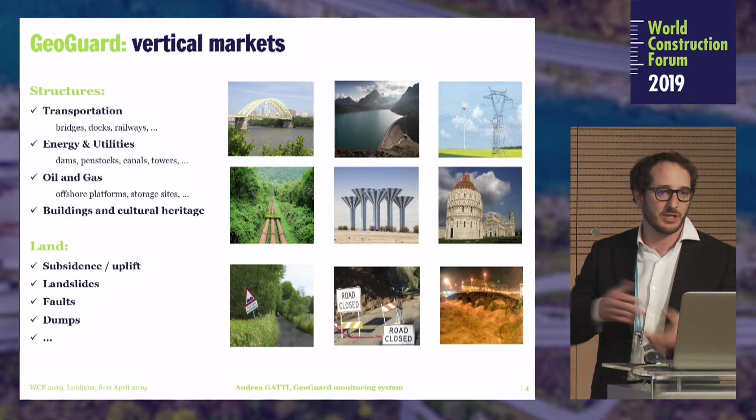GeoGuard is a service that can be used for monitoring different kinds of structures, such as buildings or bridges, but also landslides or reservoirs. We have already done a lot of installations in different kinds of structures, for different kinds of monitoring.

The system is based on relative positioning. We install a certain number of receivers on the sites that we have to monitor, and we compute relative positions from one point to all the others, or other kinds of combination. It's not required to have intervisibility between points, but we obviously need sky visibility to get satellite information.

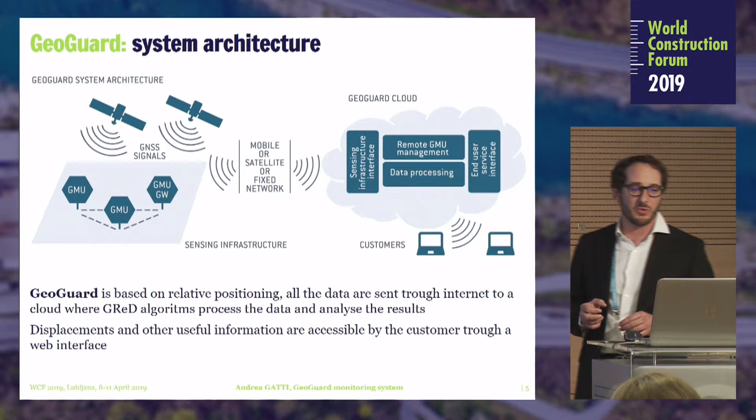The data from the stations are sent through internet or other kinds of wireless system to the cloud. In the cloud, we compute solutions and we provide the customer the information about the position of these points. Every site and every unit is calibrated and tailored specifically for that kind of installation. We provide the system as a service, and we are continuously improving our algorithms and our analysis.

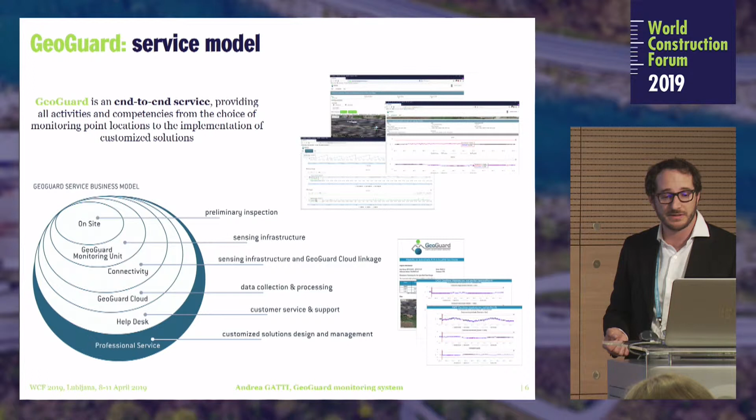We start from doing the inspection on the site, and together with the client we decide how many points are needed and where to locate them, and we follow the client until the full customization of the installation. We can also integrate other kinds of instruments and sensors into our unit to provide data to the final client.

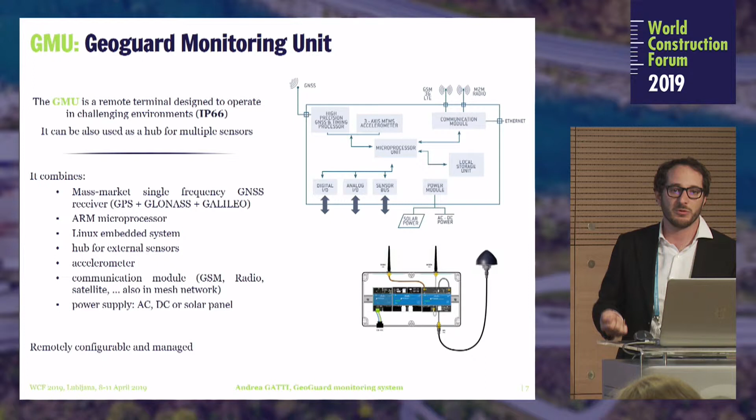This is a relatively complicated scheme of the unit, but basically it's a GNSS module together with the processing unit that can be attached to other external sensors, such as temperature, pressure, accelerometer, or whatever else. They can be installed as standalone units, with a solar panel and a battery, so they can stay alone in remote areas, or obviously attached to power and maybe an internet connection.

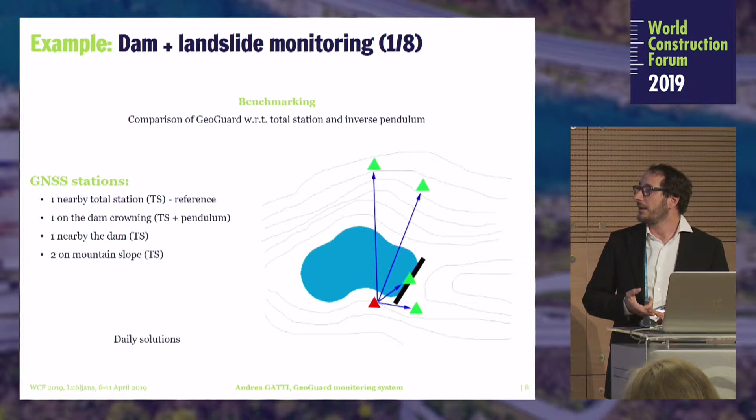The first question clients asked us in the past when we started monitoring some structures was: is this technology valid, is it comparable with traditional ones? Here I'm presenting a test that we did on a dam in Italy. On this dam there is an area where there is a landslide. The client wanted to compare the results with a pendulum and a total station that were already installed on the dam. Here we see one installation point. This is the antenna positioned on the crowning of the dam.

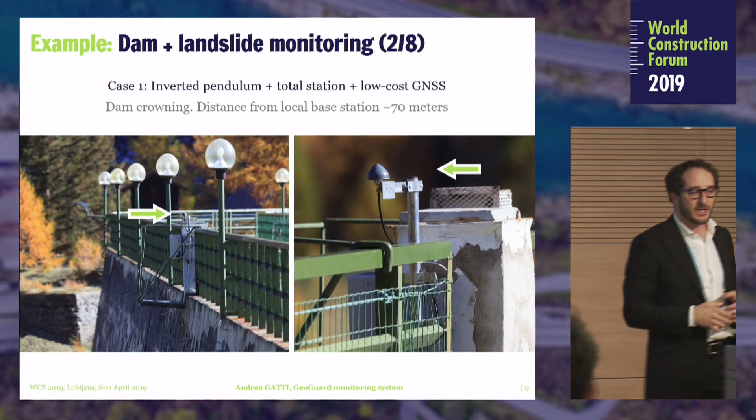On this dam we have the inverted pendulum. That's a very accurate and precise instrument, but it needs to be built within the dam. It costs thousands of euros and provides just longitudinal and transversal measurements.

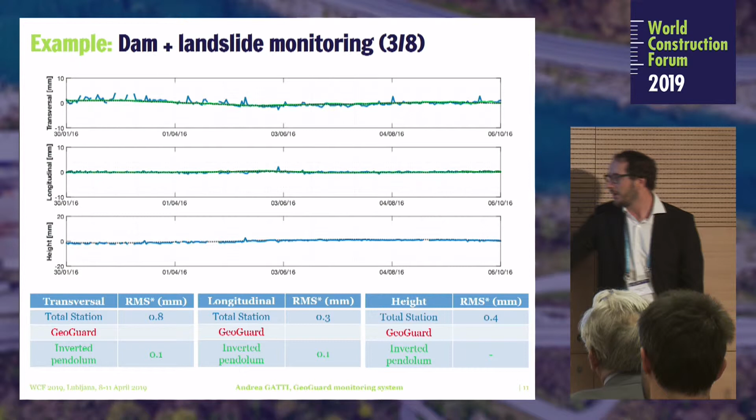Now we see the kind of accuracy that the total station can provide. The total station in this case is positioned more or less 70 meters apart from the crowning of the dam, exactly in the longitudinal direction. It works like a distance meter, so it's the best condition for the station to work. It has this kind of accuracy: 0.3 millimeters longitudinal and 0.8 transversal. It also provides information on the height of the point with an accuracy of 0.4 millimeters. So these are very good results.

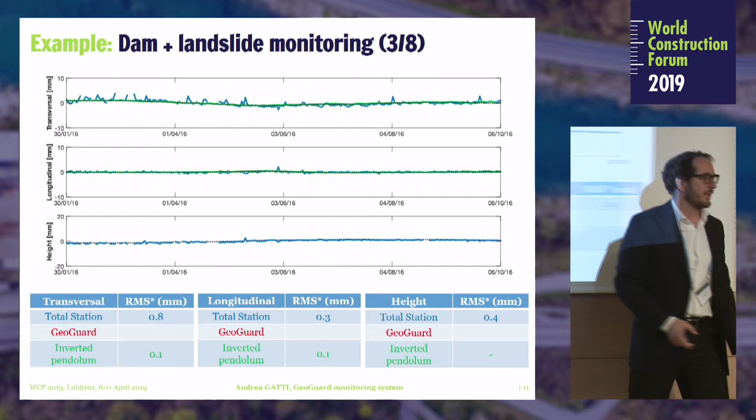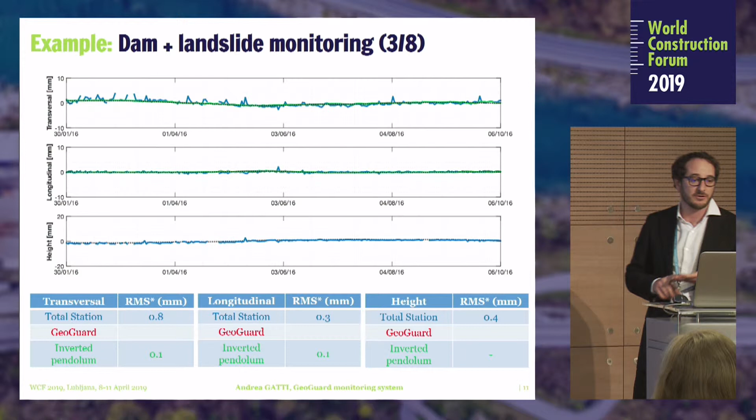But you can immediately see that there are a lot of missing points. Here we have a dam positioned in the alpine area. We have a lot of days with heavy rain, snow, fog, and in those conditions the total station cannot work and cannot provide information about the deformation of the dam.

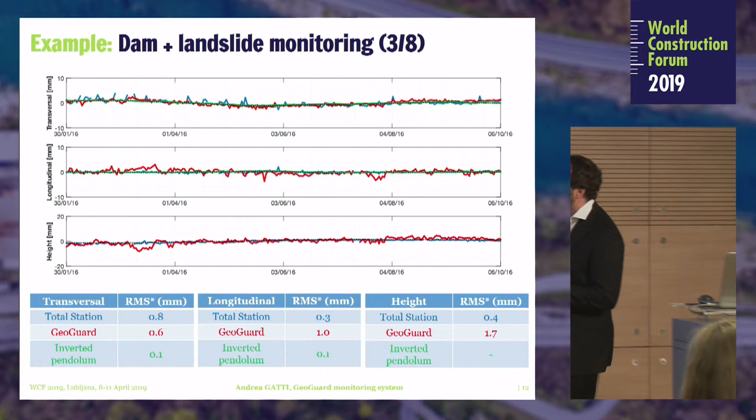But if we look at the data processed with low-cost GNSS stations, here we have a comparable value for the transversal direction. Here the baseline, the distance between the two receivers, is more or less the same 70 meters. We have a worse longitudinal accuracy, but it's comparable. Let's say 1 millimeter, it's already a good result. And 1.7 millimeters for the up coordinate. But you can see that now you have a solution for all the days, so there are no missing epochs.

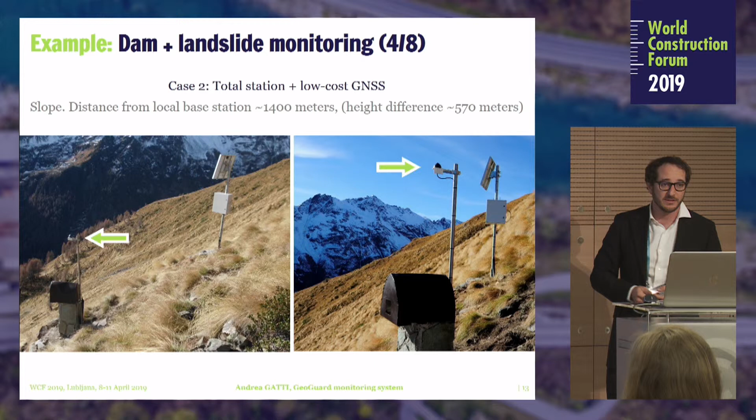And what happens if we go further from the total station? So these are two other points that are positioned on the landslide that have to be monitored because, remember, it's on top of the dam. And now we have 1.4 kilometers of distance and more or less 570 meters of difference. Well, here I don't have the inverted pendulum, obviously, because I'm no longer monitoring the dam. And these are the results of the total station.

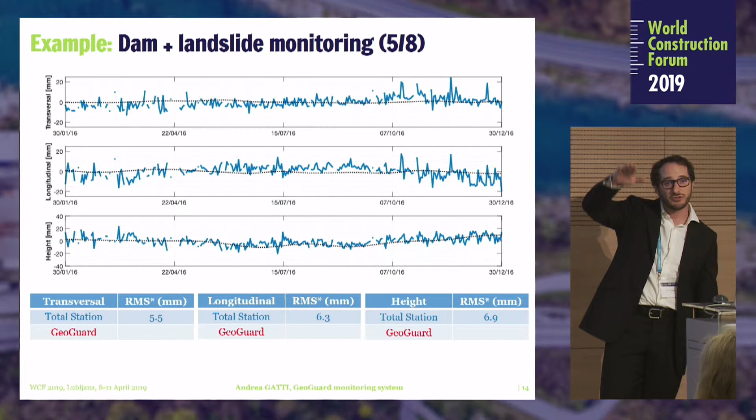As you can see, now the quality of the data provided by the total station is a lot worse than before. So we have 5.5 millimeters in transversal direction, 6.3 in longitudinal, and the height coordinate is still very good. It's 6.9 millimeters. It's good also due to the fact that the total station now is working just measuring the angle. So it's a point pretty far, pretty high, and it measures the angle for the movement of the point, and it has this kind of accuracy.

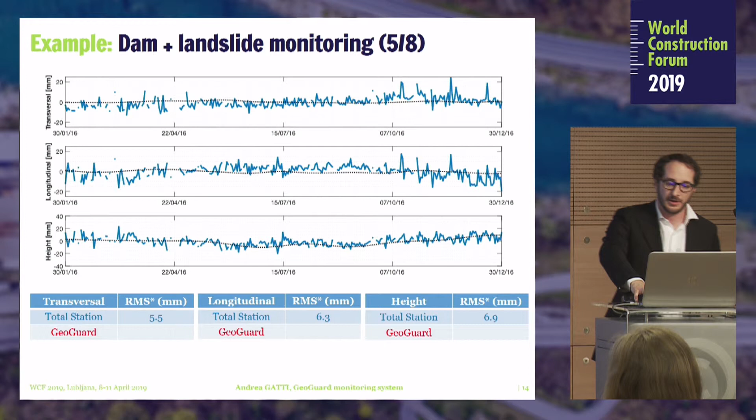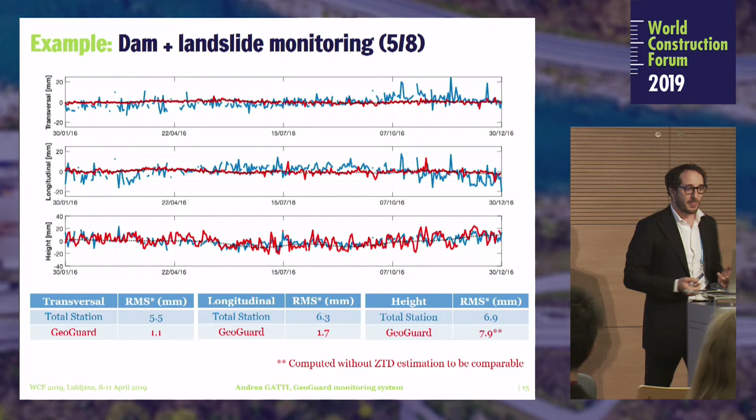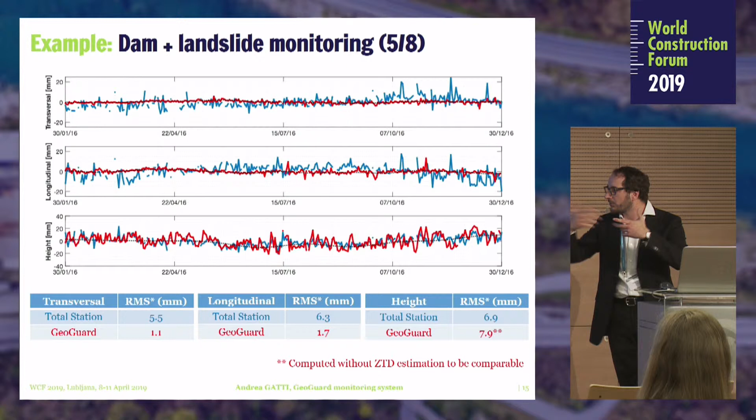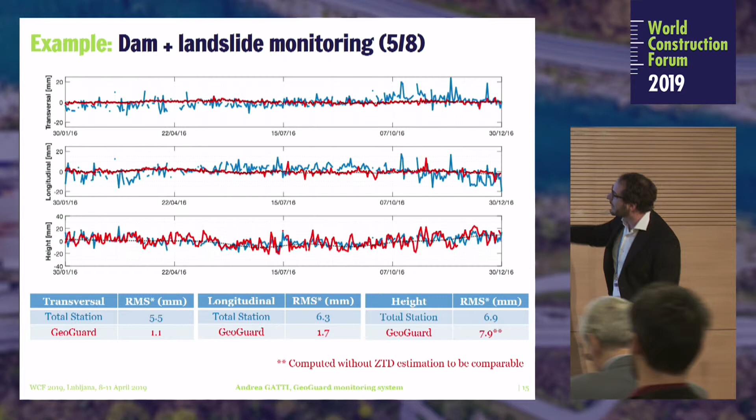If we look at the data from the GNSS, now the GNSS outperformed the total station, especially in the transversal and longitudinal direction. And obviously here we have even more points where the total station cannot provide us results due to more distance and more troposphere, more clouds, or more fog. While even in this case, the GNSS solution is continuous. For the up, you can see that there is a correlation between the two measurements. So it means that the GNSS is measuring the same kind of deformation.

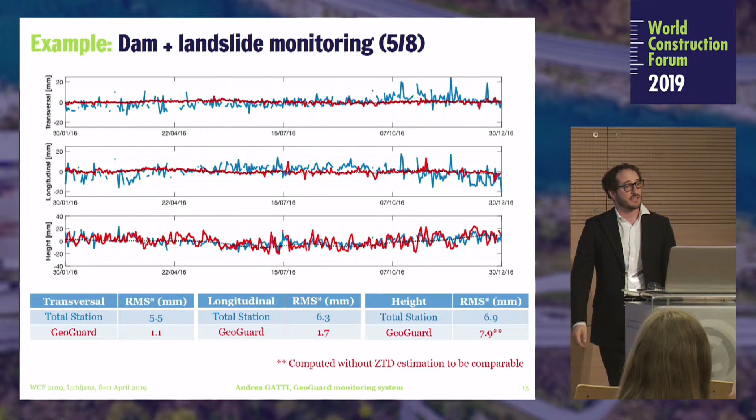But this kind of deformation can be actually improved by computing also the tropospheric effect. The client didn't want to do this because it wanted to compare the results with the total station, which were processed without taking into account the tropospheric effect due to the difference in height of the point. And this demonstrated that the system can actually work and can be compared with or even outperform traditional methods of monitoring.

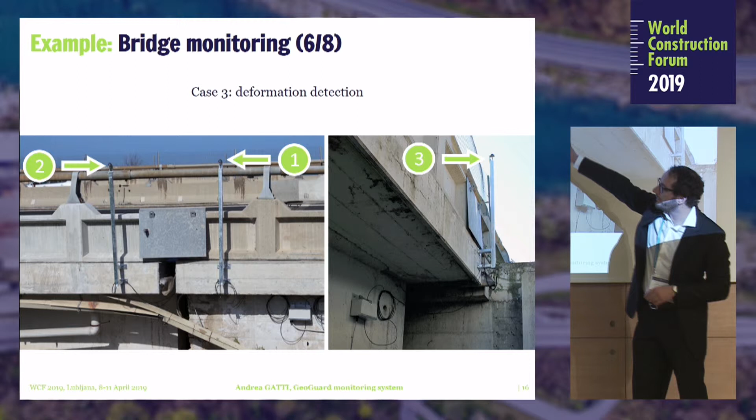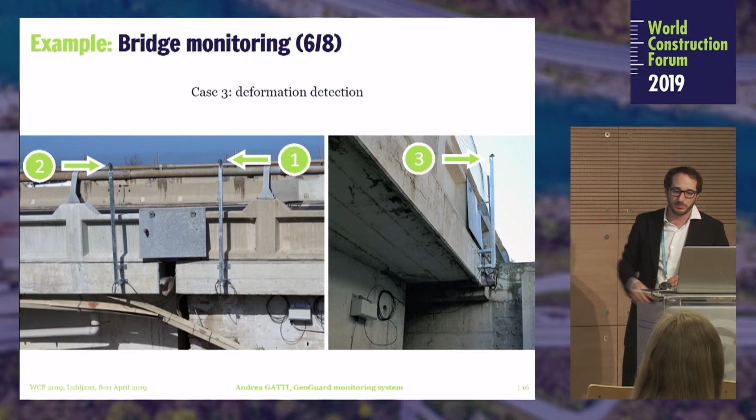Here we see a different kind of installation on a bridge in Italy of Autostrade per l'Italia. And we have the following condition. We have a point, number 3, positioned on one side of the bridge that has been built on bedrock, so it's stable. The other side of the bridge is on a landslide area. And we have, thank you. We have point 1 that is on the pole of the other side of the bridge, while point number 2 can freely move. Here you can see a scheme.

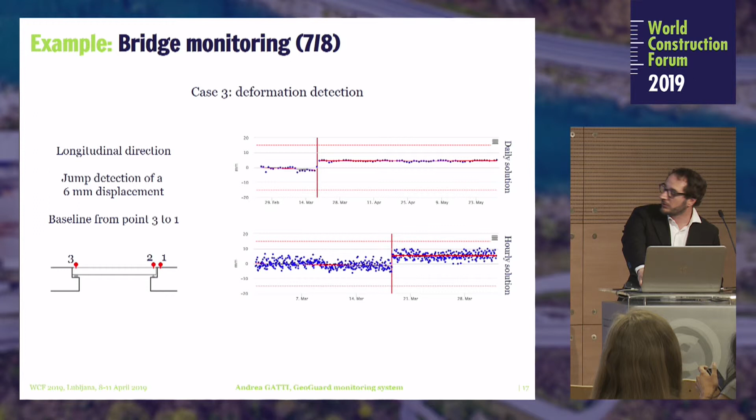Basically, what we see is that these are actually real data. We see that we can detect a movement on the bridge of 6 millimeters that has been happening. And here you can see how in the daily solution or even in the hourly solution we can see the discrepancy of the position and find that there has been a movement and the bridge must be, well, in a certain way checked or monitored because something is happening.

Well, to improve the data, we also have to analyze other external sensors. So we try to include the information from just a normal temperature sensor. If we look at the green line, you can see clearly that the temperature is related especially with the longitudinal position of the point. And this is simple. Obviously, the bridge is dilating with the temperature.

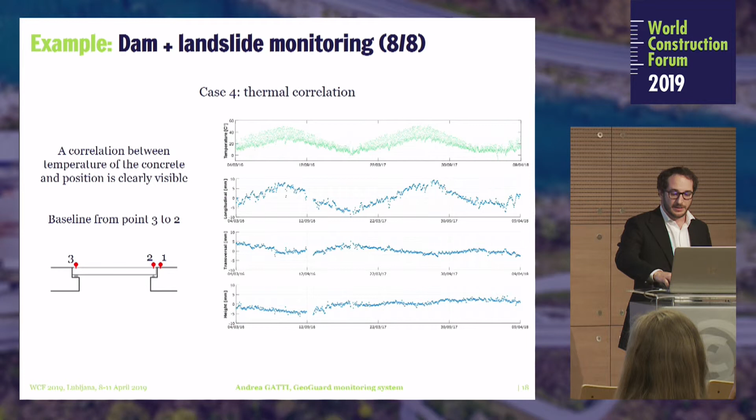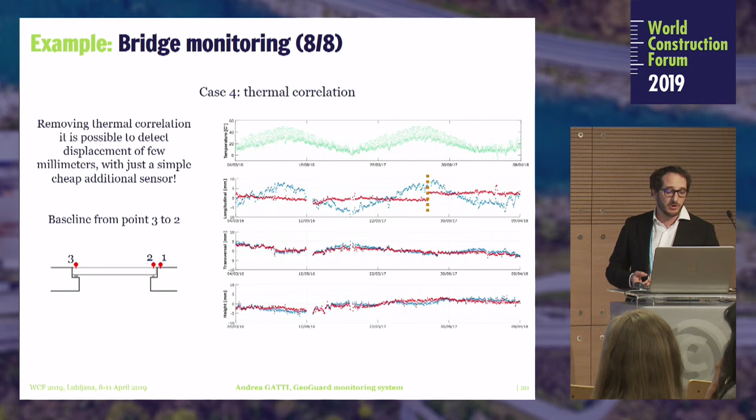So if we try to model the movement of the point taking into account the temperature, we can actually detect also very small movements. Like here, we have a movement of just 3 millimeters that was completely hidden by the other kind of analysis not based on an external sensor. So in principle, we are showing that we can also integrate the instrument with other external information to improve our solution and our modeling of the movement of the points.

To conclude, I would like to state that monitoring with single frequency low-cost receivers is possible. We have more than 100 points monitored constantly all over Italy. We have points in Japan and some in Holland. And the results have been validated and they have been demonstrated to be a valid support for management of bridges or other structures.

We have also verified that our station can resist extreme weather conditions. We have a couple of points, for example, in the Alpine area, where there are more than 3 meters of snow. And in that condition, the instruments are continuously responding every day, every hour, and everything works fine. And that's all. I don't have a statement, but the statement could be that monitoring of structures, especially considering that the structures are aging and sometimes are built on landslides, is very important.